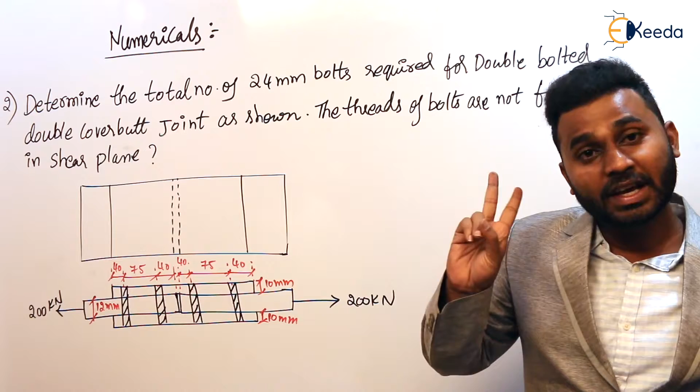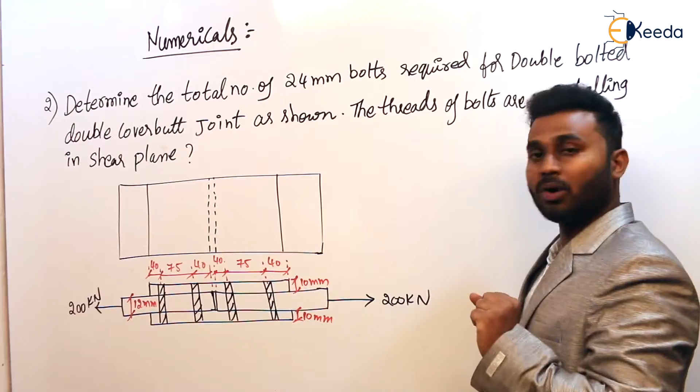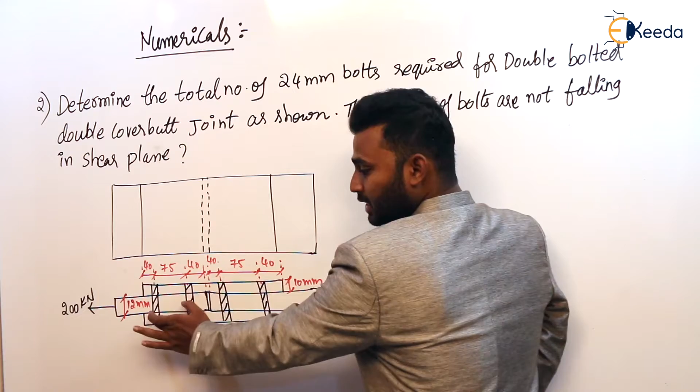So we know what is double bolted. Double bolted is nothing but if there exist two lines of bolts, then it is known as double bolted. As we made clear in the introduction, for double cover butt joint or simply butt joint, we have to consider only one side, either right or left, so forget about the other side. See here, how many lines are there? Two lines, and in each line there exists n number of bolts. But if there exist two lines in one side, then that is known as double bolted.

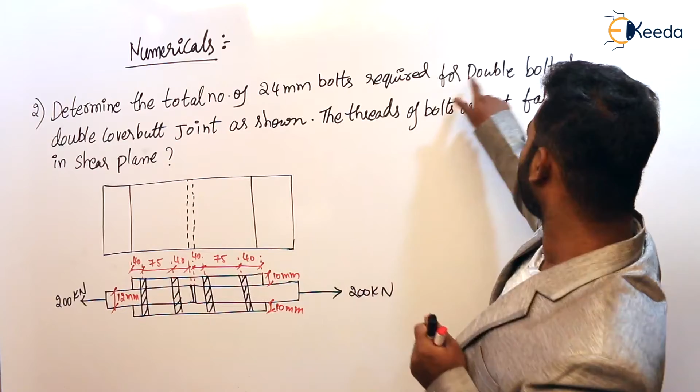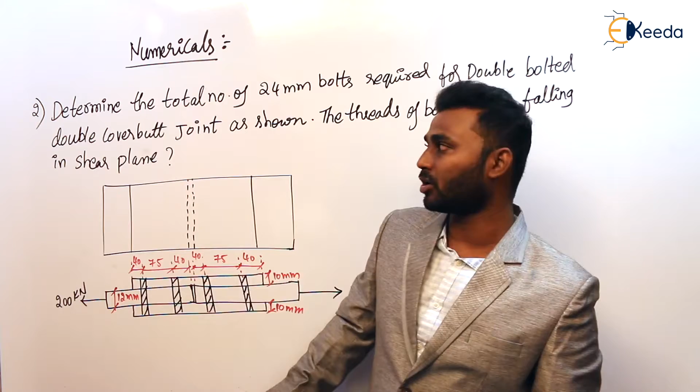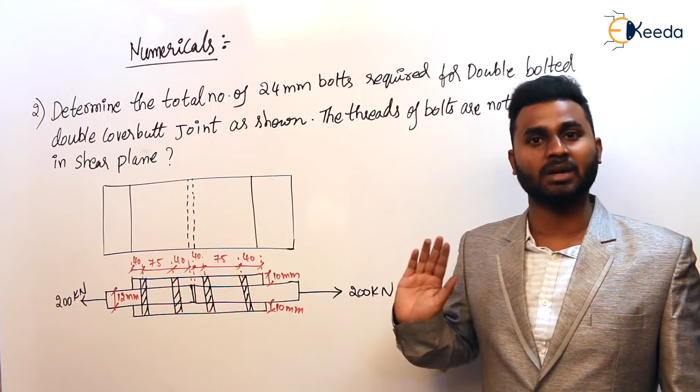Double cover butt joint - what is meant by this? If there exist two cover plates, top and bottom, for connecting the two main members or main plates, that is known as double cover butt joint, as shown. Now one more thing is mentioned here: the threads of bolts are not falling in the shear plane. In this question it is clearly mentioned. If it is not mentioned, we have to assume the threads are in the shear plane or intercepting the shear plane, but here it is mentioned, so no need to consider that.

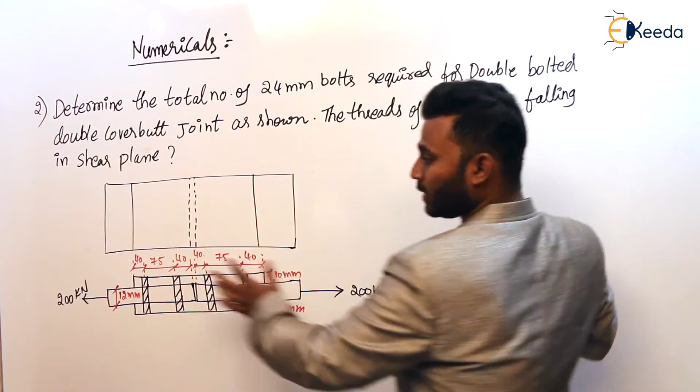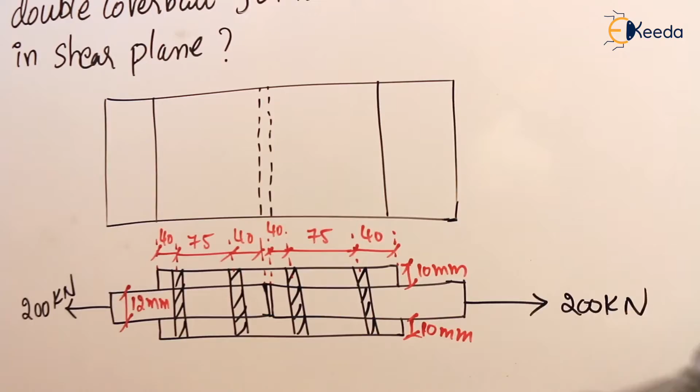Now let us see how to calculate it. In the diagram, the distance in the direction of load is known as pitch, so this is pitch and this is edge distance. So edge distance, end distance and pitch are given. Also, thickness of main plate is 12 mm and thickness of cover plate is 10 mm. So these are the given things, along with the dia of the bolt given in the question.

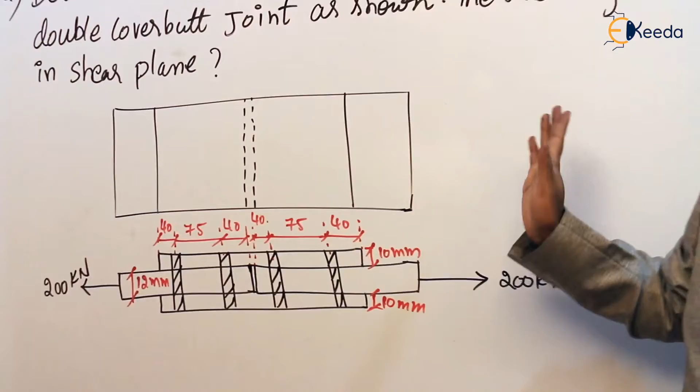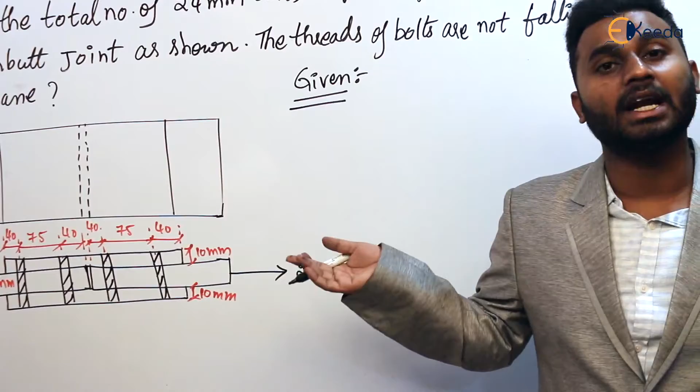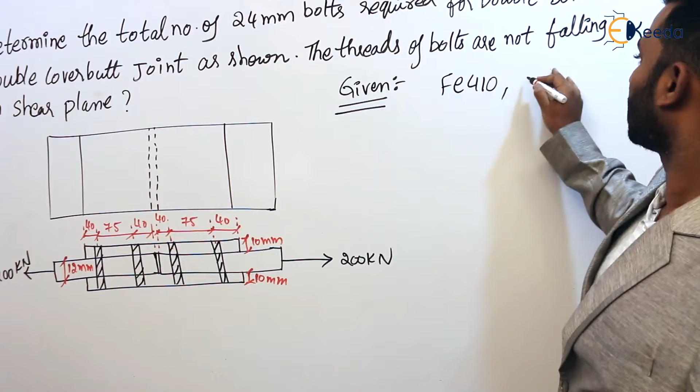So first let us write the given things. If you see here, nothing is mentioned about the type of material or grade of steel and grade of connections or bolts. So if nothing is mentioned, we consider Fe410, and bolts are of grade 4.6. We know what is meant by 4.6 and what is Fe410.

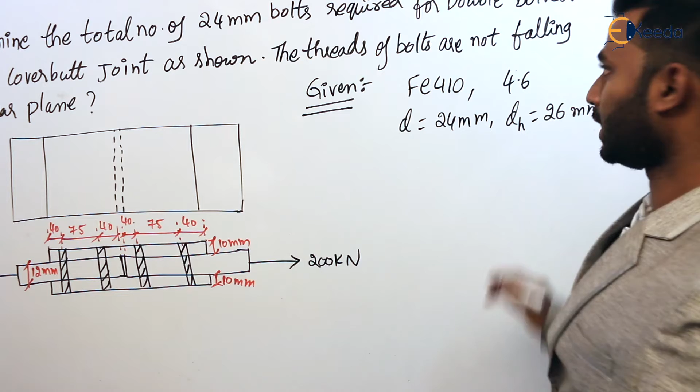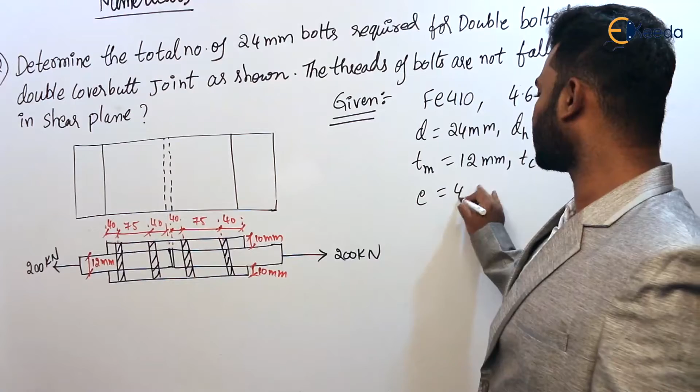Dia of the bolt given in the question is 24 mm, and dia of the hole is 26 mm. Thickness of main member is 12 mm and thickness of cover plate is 10 mm. Edge distance and end distance: end distance is 40 mm, pitch is 75 mm. So these are the given informations.

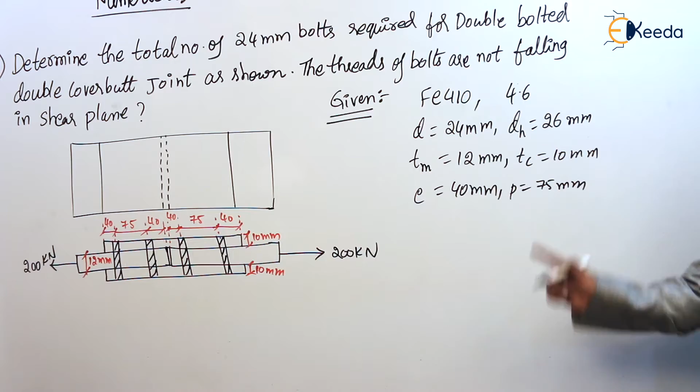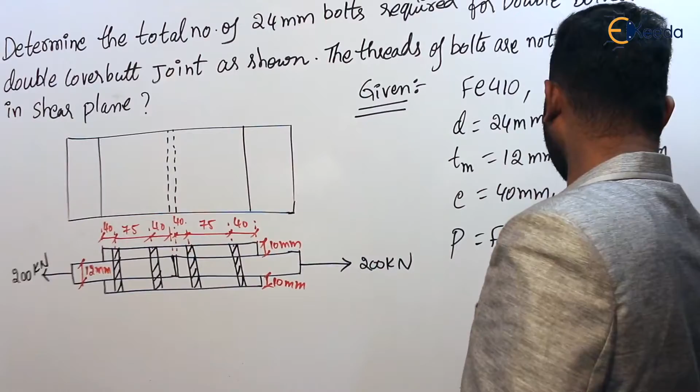So now he is asking us to find the number of bolts required. One more thing given in the question is the external load or design load, P or FD, which equals 200 kilonewton. We can also represent it as PD, so PD or FD is equal to 200 kilonewton. These are the given informations.

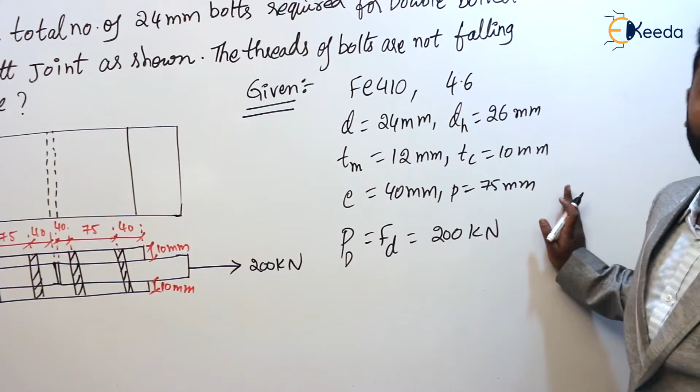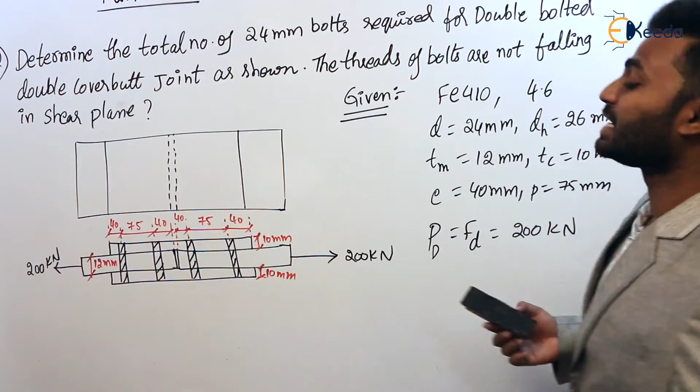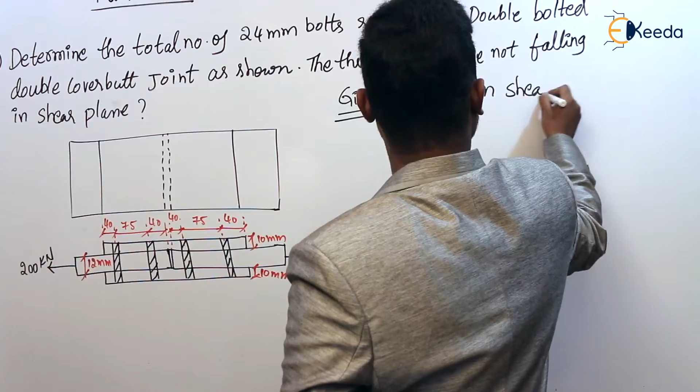So first take down the given informations, then let us see how to calculate the number of bolts required. First we have to calculate the design shear strength of the bolt.

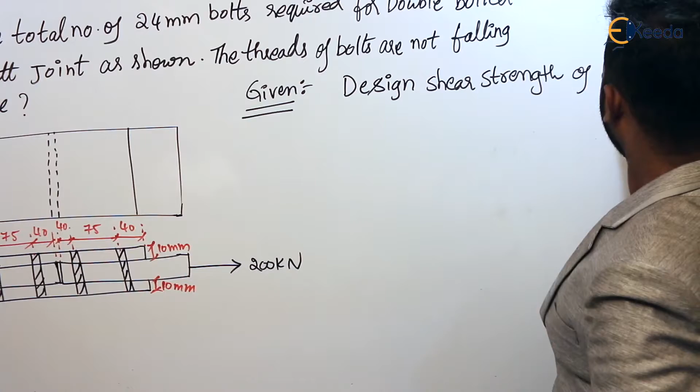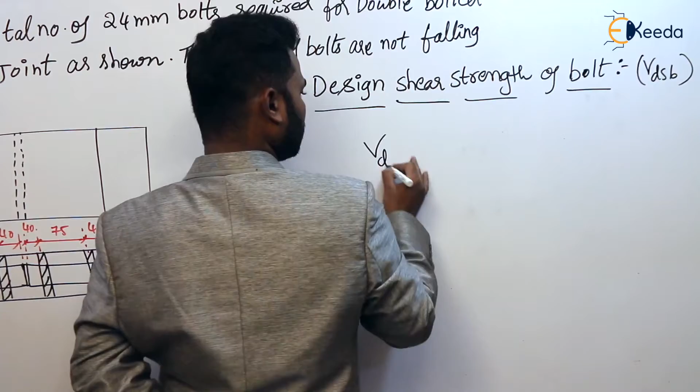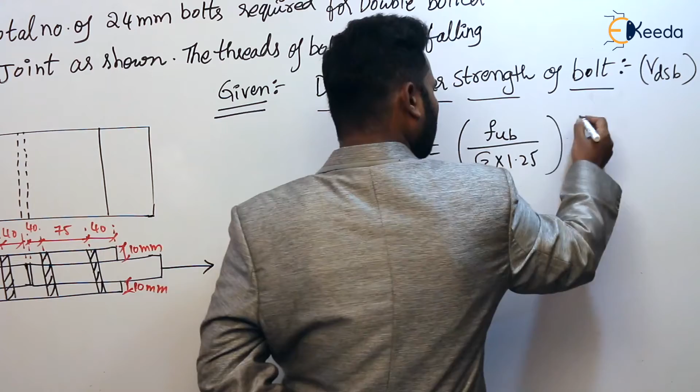We know the formula: shear area into permissible stress. Permissible stress in shear is FUB by root 3 into 1.25, into area. Here, since threaded portions are not intercepting, there is no need to consider the net area. And since it is in double shear, it is 2 into pi by 4 d square.

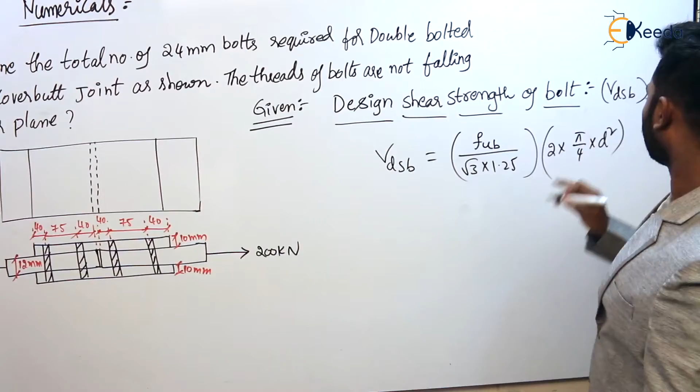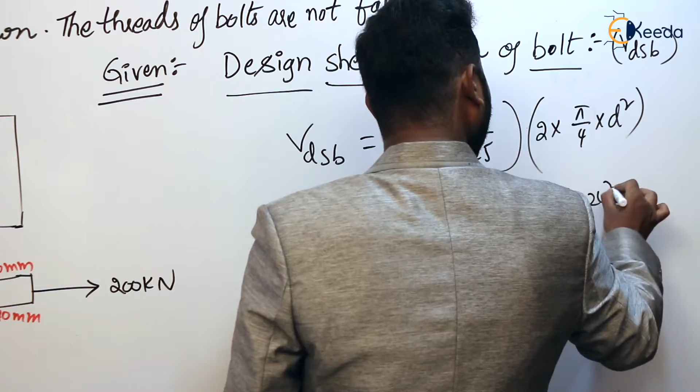So if we substitute, FUB - if nothing is given we have to take 4.6 grade, which has an ultimate tensile strength of 400. So 400 by root 3 into 1.25 into 2 into pi by 4 into 24 whole square. How much does it come out to be? It comes out to be 167.13 kilonewton, so that is the design shear strength.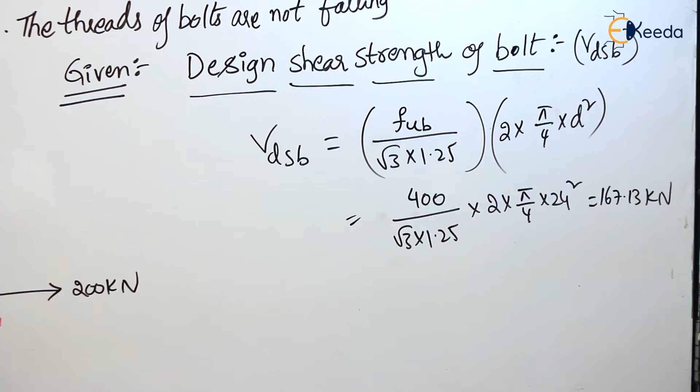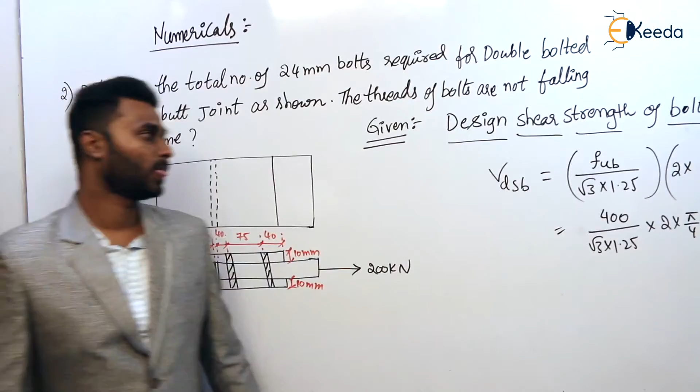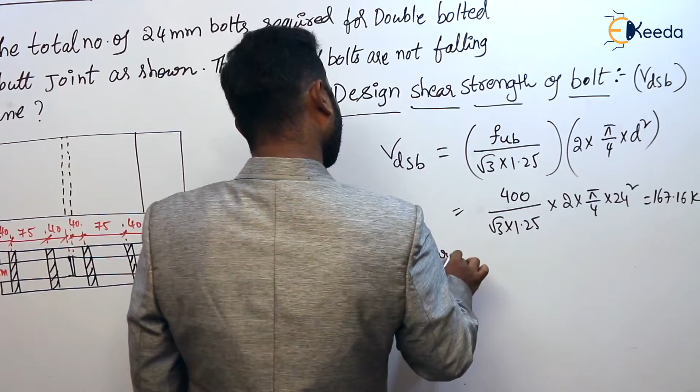167.16. That is the design shear strength of bolt. So after calculating the design shear strength of bolt, let us calculate the design bearing strength of the bolt. So first you take it down. Next, design bearing strength of the bolt.

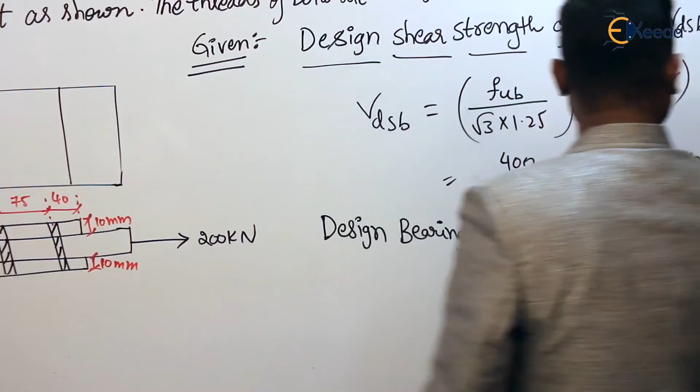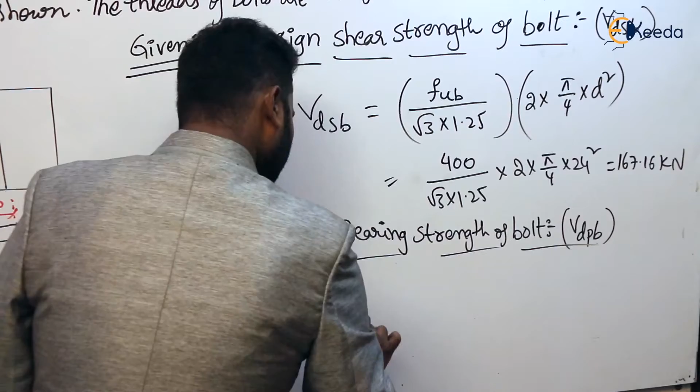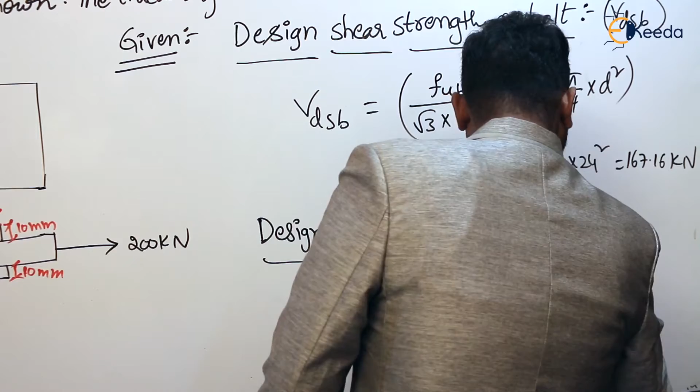Again for this also we know the formula. What is the design bearing strength of the bolt? VdPb is 2.5 kb Fub by 1.25 into D into T. So that is the formula. Simply the formula is nothing but permissible stress into area, that's it.

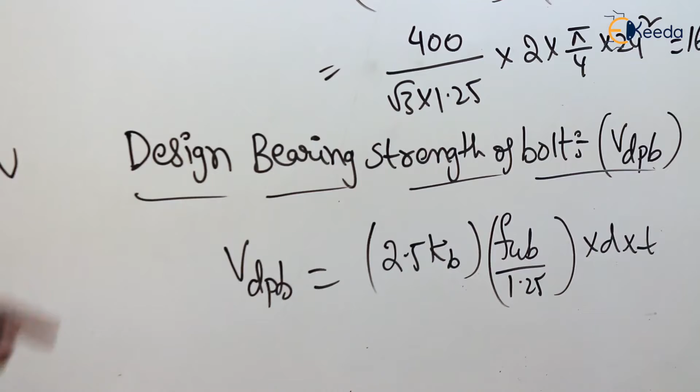So how to calculate kb? We know that kb is a minimum of E by 3dh, comma P by 3dh minus 0.25, comma Fub by Fu, comma 1. Out of all those, whichever is minimum, that is taken as kb.

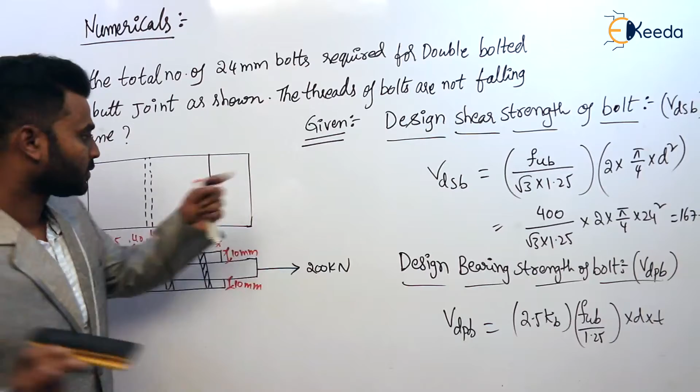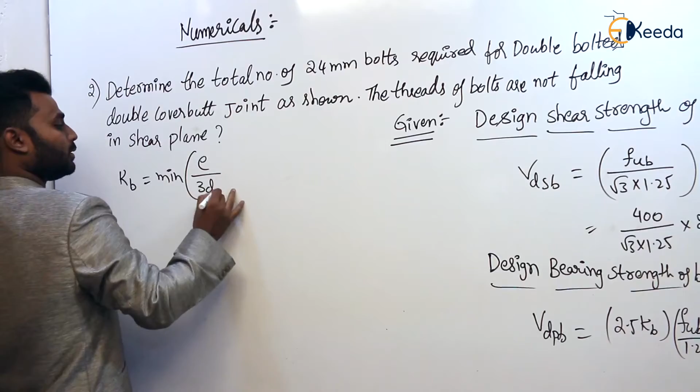So now let us calculate it. I am going to rub this diagram. So kb is a minimum of E by 3dh, comma P by 3dh minus 0.25, comma Fub by Fu, comma P. So first let us calculate this, E by...

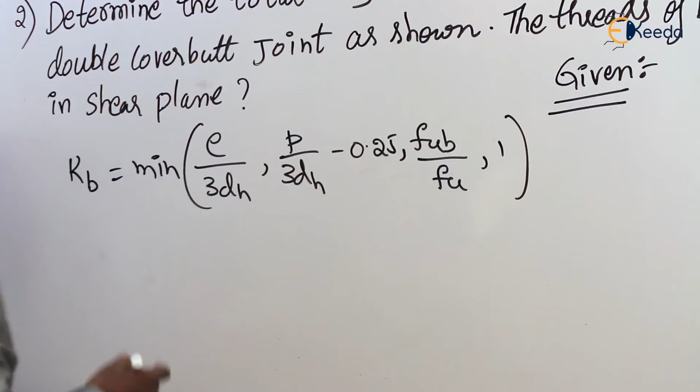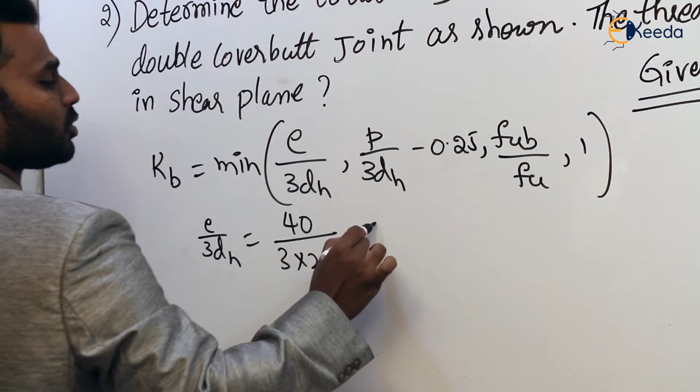3dh. E is given in the question, 40 by 3 into 26. So it comes out to be 0.51 something. So it is 0.513.

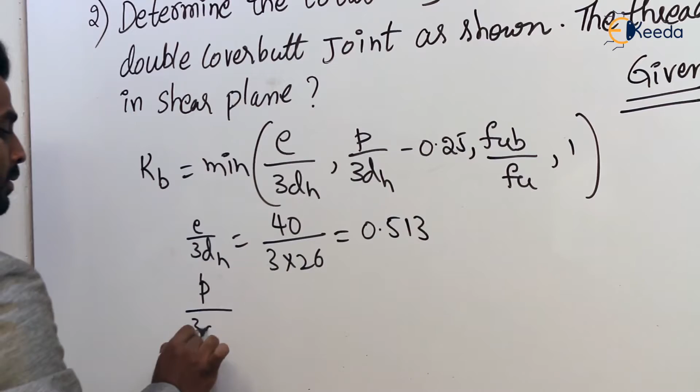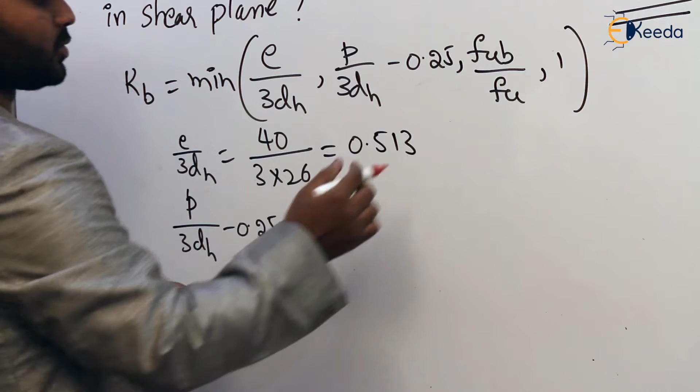Next, P by 3dh minus 0.25. So it comes out to be 0.71. We know that Fub by Fu is 0.98 and 1. So which is minimum now? This is minimum, so 0.513. This is considered as the kb value. So that is the kb value.

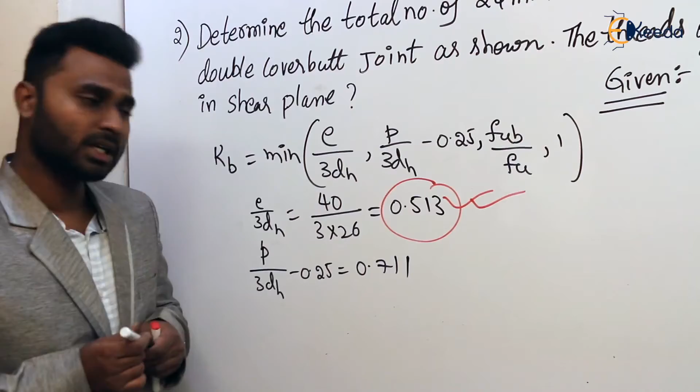And Fub is 400. And D is the diameter of the bolt, it is 24, and T. So how to calculate T? We know that. T is the minimum of...

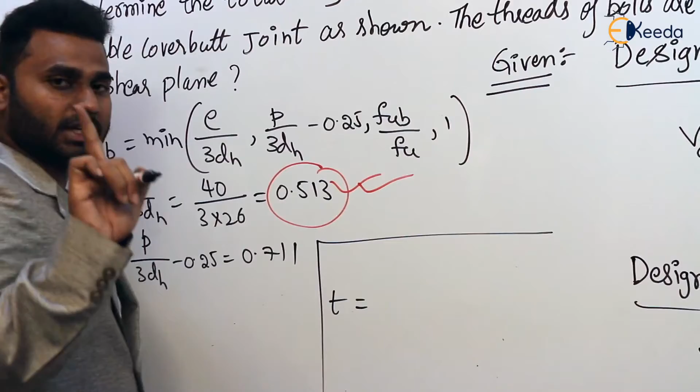Sum of cover plate thickness. How much is the cover plate? Cover plate thickness is 10. So each cover plate thickness is 10. 10 plus 10 is 20. So 20 mm.

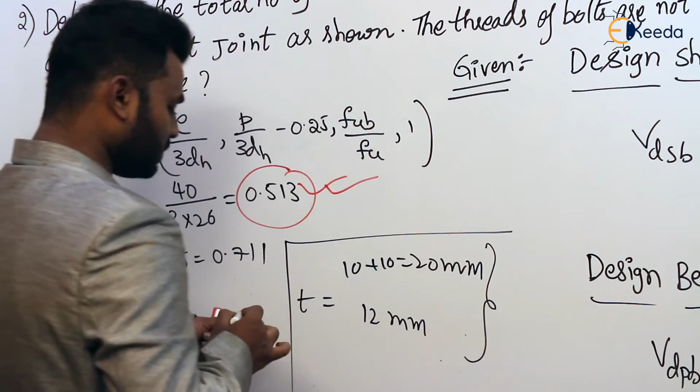And the main plate is 12 mm. So out of these we have to take the minimum. So which is minimum? The minimum is 12 here. This is minimum. So now substitute these terms in this formula.

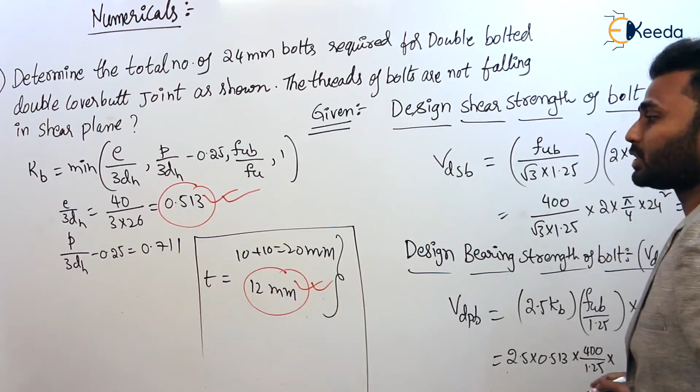2.5 into kb is 0.513 into 400 by 1.25 into D. D how much? 24. T how much? 12. So we are going to get 118.195 kilonewton.

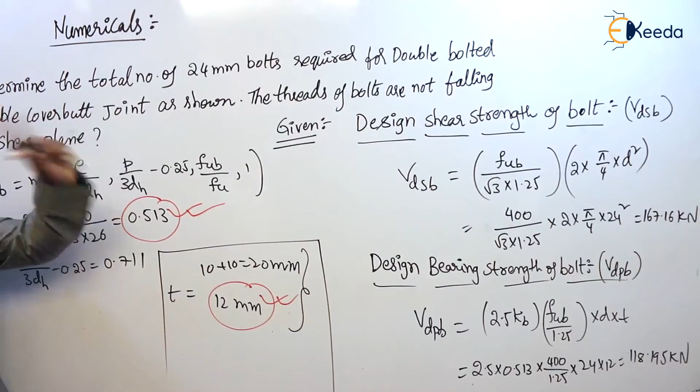So now he is asking us to find the number of bolts required. We know that external load is how much? 200 kilonewton. And now the design strength, how much is the design strength? Out of these two we have to take the minimum. So the minimum is 118.195. That is the minimum.

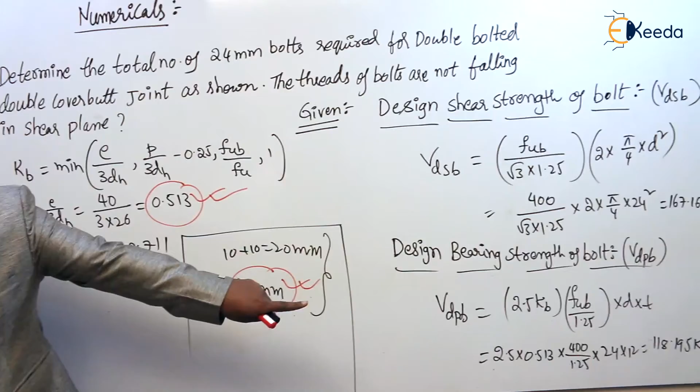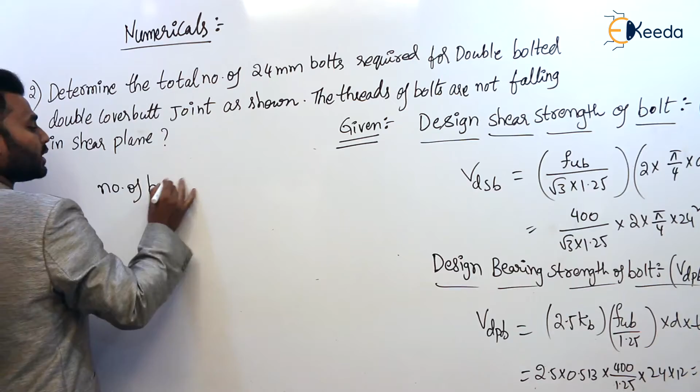So if we divide that external load by this strength, we are going to get the number of bolts or not? Yes, obviously we are going to get the number of bolts. Number of bolts required, N, is equal to external load PD by the strength.

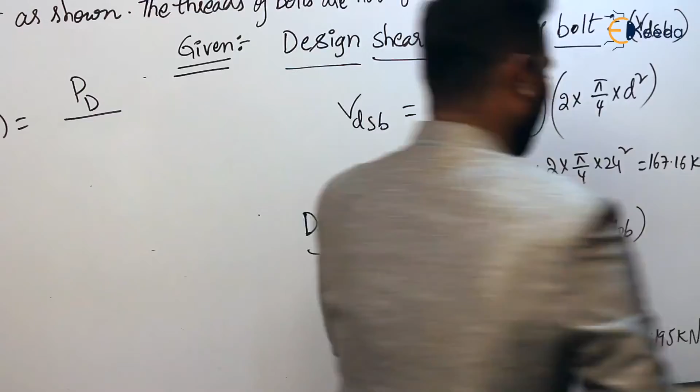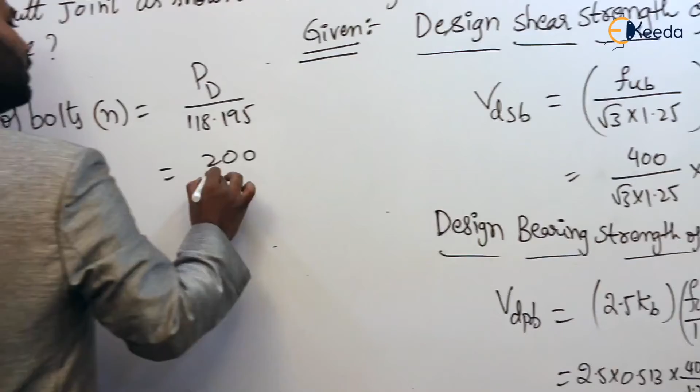So how much is the strength? We should consider the minimum. This is the minimum, so this is considered as the strength. How much? 118.195. So 200 by 118.195, which is 1.69.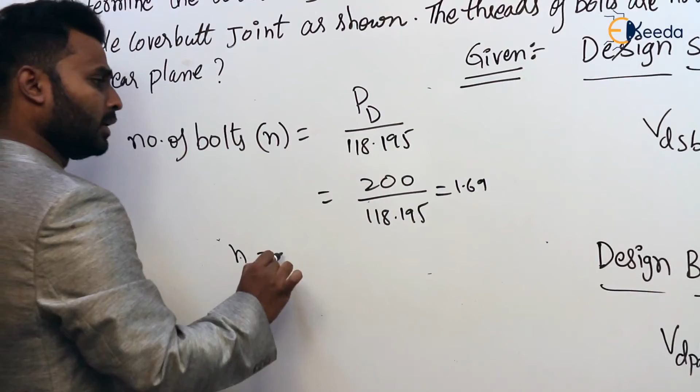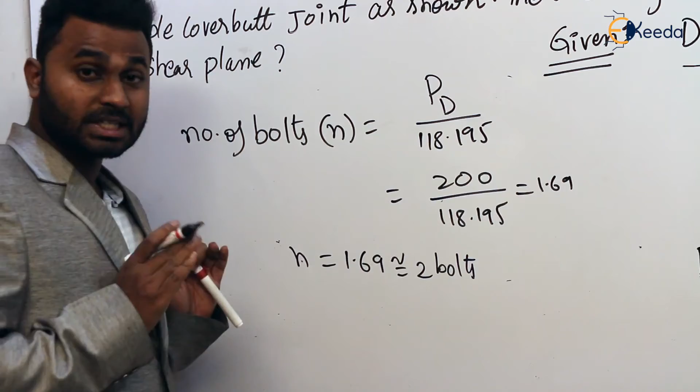So 1.69 number of bolts are required. We can approximate it. So approximately how many bolts are required? Exactly 1.69, so approximately 2 bolts are required. So it requires 2 bolts. Place 1 bolt in each line. So total number of bolts present in this connection is 4. But number of bolts present on one side is 2. So this is the answer: the number of bolts required to take the given load of 200 kilonewton is 2.

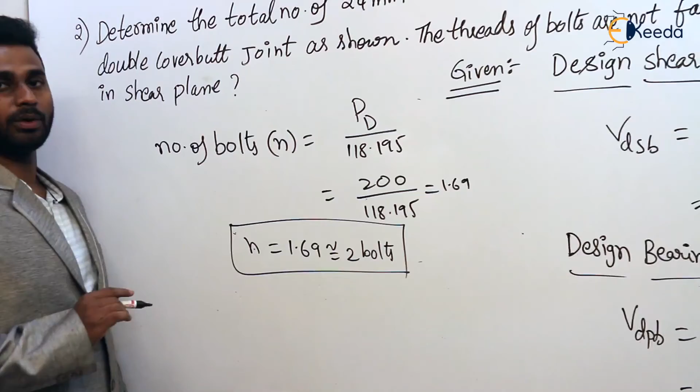So take it down, 1 in each line. If you see in the diagram, there exist 2 lines of bolts. So each bolt in each line.